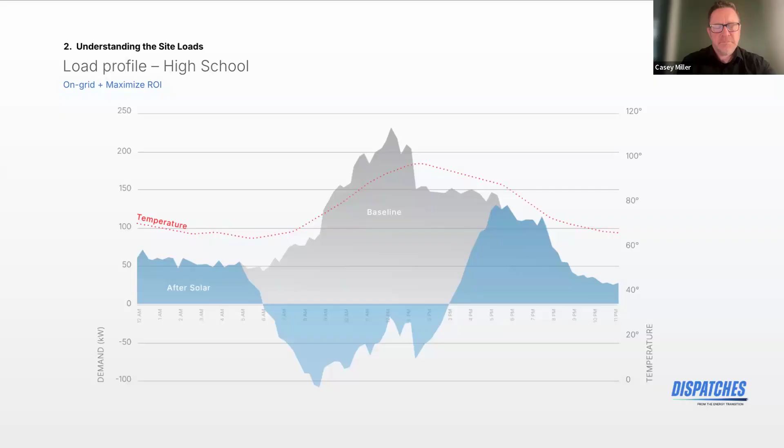Like we have a confidence interval for our estimations, but it will never be 100% confidence. So just noting all of your assumptions, all of the edits you've had to make to your data can also go a long way when you're in this preliminary analysis stage. Yeah. But Jacob, I don't know if you have anything else to add on the Mayfield side of how we generally approach that early stage of a feasibility and getting to know the site in general.

Yeah, there's more to it than just the energy. The energy is one of the most important pieces to that model. We have also done projects where you go install a meter and you actually collect data for a shorter period of time, because you typically don't want to spend a year doing this. You collect a short amount of data, maybe a month or something, and then you scale some of these other energy models around the year to make an approximation. So there are other ways of doing this.

A lot of it comes back to this risk mitigation question. How important is the risk to you as a developer, as a site owner, as an asset owner in the long run? With projects that are very, very tied to the revenue return, this is much more important, in that you can start failing on this project if you don't get it right. In those situations, you really need to reduce the risk somehow. You need to find a way.

Other situations are more along the lines of resiliency, right? Where you're looking at, okay, we need to have 2 days of backup for your selected loads. In that case, if that turns out to be plus or minus a day, you need to scale that risk appropriately, and then you can be in a much better place. So it comes down to really understanding the goals and the risks associated, looking at these with that lens, and making sure that you have the data you need to address the risks.

Go ahead, Robert, you were talking. Oh, it's okay. Great feedback on one example. Casey, you're familiar with this example. I know that Elexity is heading to the National Auto Dealers Association conference coming up soon. You work with a lot of car dealerships. Let's walk through this here.

Yeah, here's another example. It looks similar to the high school. This is a car dealership in Texas. The data is a little smoother. Why is that? Well, we actually have 30-minute interval data versus 15-minute data from this utility. So you might notice that solar is doing a similar thing to the baseline data, attacking a lot of that during the middle of the day, leaving these horns on the front end and the back end of the day. And that's the net load after solar that we're really looking at to decide how to attack that with the battery.

But this customer's use case was more about, hey, give me some bill savings to help pay for resilience. And I want a couple hours at least of backup, ideally four, make that the most affordable you can. So reduce my bill with the battery when you can, and give me resiliency when I need it. Very different use case than the high school before. A little bit similar load profile. This is actually a fall day, so you see a little bit of heating in the morning, that morning horn, and some cooling in the afternoon.

Robert, you talked about NADA and dealerships. This is a big segment target for us at Elexity. This is a customer type that needs help to both manage their building and control their energy costs. And back to the feasibility question and some of the things Jacob was talking about earlier, their buildings are changing. They're adding things like EV chargers to their electric load over the next few years. So this is a segment that we focus on serving quite a bit. They need platforms like what Elexity can offer.

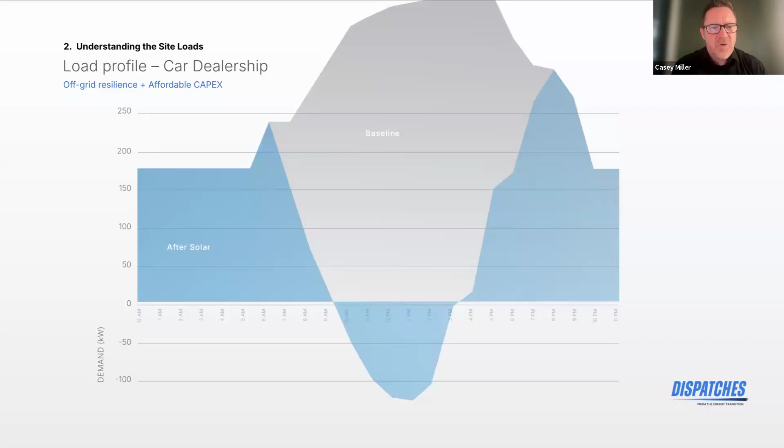I think we have one more profile to look at that's quite a bit different than this, and that's a manufacturing facility. Hopefully, what jumps off the page a little bit to you is their energy use looks very similar 24/7. Why is that? They're running three shifts, and they're really never having a period of time during that 24-hour period where they're just at base loads and maybe just keeping the lights on.

You see some peaks throughout those shifts when things like motor loads turn on, but this is a very different picture than what you saw with the high school and with the car dealership. Again, solar does a great job of attacking the middle of the day, but you're left with quite a bit of time to manage those loads that are over a megawatt at peak.

I have a general question. I'll kind of open up the floor, including you, Lucas. The C&I market segment has lagged residential and utility scale in part due to complexity, right? There's a lot of business types, building types. Where do you see the greatest low hanging fruit in the segment? So what segment type or building type do you think we should really be paying attention to heading into the new year? Or is it all of them?

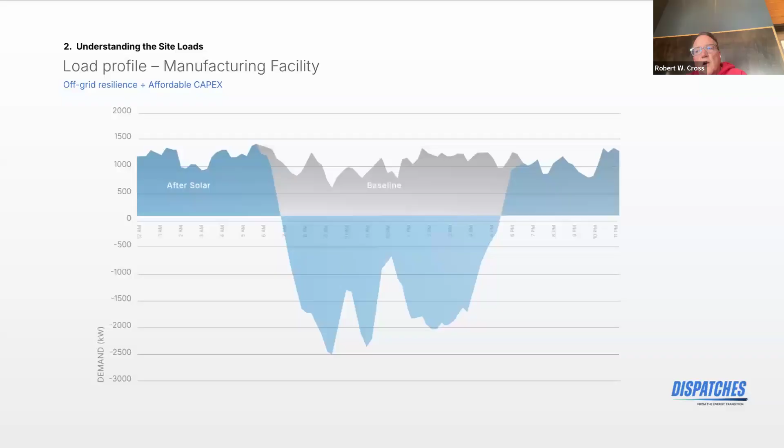From your perspective, is it refrigeration? Is it C&I? I mean, you've been in the industry a really long time and have seen the hardware side, the software side, what's your perspective heading into the new year? Well, it's a big question, Robert. I would say this from a battery perspective, really customers in the C&I space are motivated by economics, either the benefit of resiliency to keep business operations running or attacking a really expensive energy bill.

And if you have like a 50,000 square foot building or larger in San Diego, you're going to have a 2 to 3 year payback on a 125 kilowatt 2 hour battery just to attack those $90 a kilowatt peak demand charges and high energy prices. If you're in Northern California, it might be a 3 or 4 year payback period to either do arbitrage or attack demand charges. We see programs in the Northeast, like with Eversource and National Grid, or now PJM, where participating in grid services can generate almost equivalent payback periods as you do in Southern California.

So there's a lot of variability around the country. And one of the things we look at when we model, of course, are the electricity rates and where they're headed and how they're increasing. But there's some locations in this country where it is a no-brainer economically to install a battery, whether it's in a microgrid case or an on-grid situation.

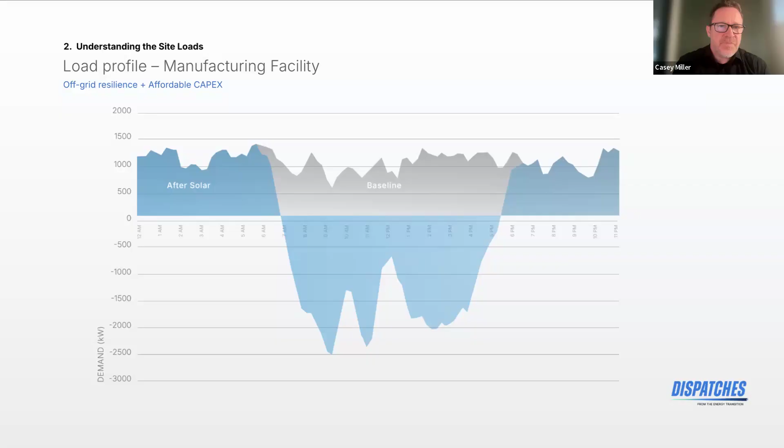Well, I want the audience to kind of hold these three sites in mind for the rest of the slides here. We're really going to deep dive into each of these and a head-to-head comparison of, is a microgrid the right solution for these sites? What is the impact that a BESS could have financially or otherwise? We're going to build this slide up piece by piece to do that head-to-head comparison and then end with a few case studies.

Jacob, maybe let's start with you. So we are in what we're calling the third pillar at this point. So we're in modeling, executing on the project plan. Talk a little bit more broadly about what stage we're at here in the process and really what goes into this third pillar. So this is where everything starts to come together. This is where you're actually doing the analysis of the different pieces. You're building a computer model of the site. You're looking at what economic benefits there are, what resiliency you can achieve.

As you change things, this is where you can also test things. You want to do larger, smaller BESS. You want to bring on this dynamic load control that we'll talk about in a minute. You want to bring these things in and start really analyzing what the site or what this project is going to look like, and how that's going to best achieve your goals.

This includes things like the actual model, which there's a number of providers out there that have software for this, but you have to have the understanding of these modeling software packages to be able to select the ones that make the most sense for the project type, the efficiency, everything else. This is also where you're really looking at, okay, what feasibility is needed to reduce risk for this specific project rather than being an all-inclusive option.

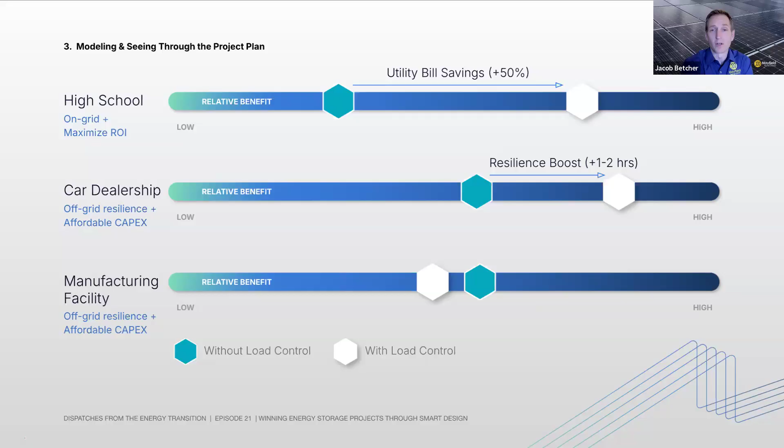Yeah, as you said, the rate of change in this market is very large. It's growing very fast as well. There's a challenge with that rate of change in that there's a lot of new people coming to the market. And for our part of the market, which is that middle market, there's people coming from residential, there's people coming from utility scale. There's some complexities here that are very unique to the market, and we do need to continually educate and grow and help people understand things.

If I take it from a little bit different perspective, our clients are developers who are doing a number of projects per year. They are seeing the projects that they're doing. As engineers, we see hundreds, often 10 times plus what our clients are seeing for projects. And this gives us the unique advantage of learning things much quicker. So part of that, again, is bringing that back to the industry.

One of the reasons I was really excited about this call today is talking about this dynamic load control, what Elexity brings to the table here. I'm going to make a little pitch for Elexity. This is something that a lot of the industry doesn't know about. The industry doesn't really know that it's available. It's something that can add value, and it's relatively straightforward. This is not brand new technology. It is taking technology that's been in the industry for a long time and bringing it together into this ability to control a microgrid and a facility. And this slide shows very well, in some places it's almost a no-brainer to bring this type of technology into the project.

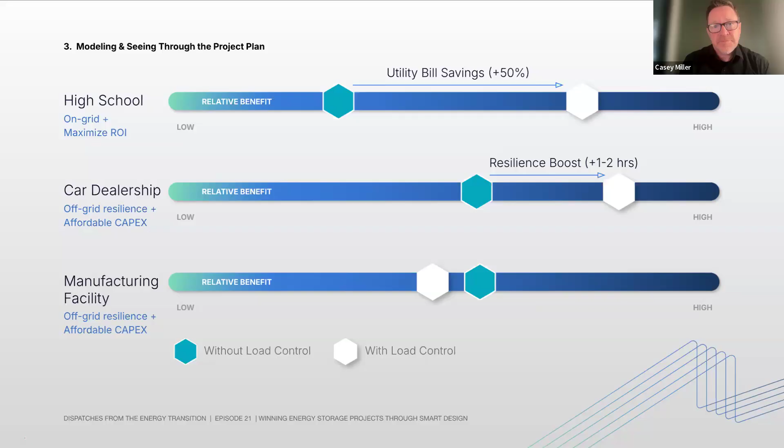In that case, boy, it's off the top of my head, but it probably under-delivers by about 30% because of a technical interconnect limitation that was missed. I'll talk about this in a little bit different direction. Casey gets to see, and he's part of that operation of the systems afterwards, so he gets to see a lot more detail on that.

One of the things we've seen at Mayfield is that people will come to us asking about feasibility, and they have conceptions about what their products are going to do, how they will perform. And the number of times that we've gone through the feasibility efforts, starting with these three pillars, working through with the clients, and getting to the point at the end of the day where they have completely changed their expectations or changed the products that were used, the sizes of things that were used because of that feasibility analysis.

And that is something we see probably more often than not, is that the feasibility study led to core changes in the design of the system before engineering happened. All of that would have ended up happening after engineering, and a large timeline delay and other risks that would have come up because it was not done early. But we do see quite a lot of change early on in that project because of the feasibility analysis.

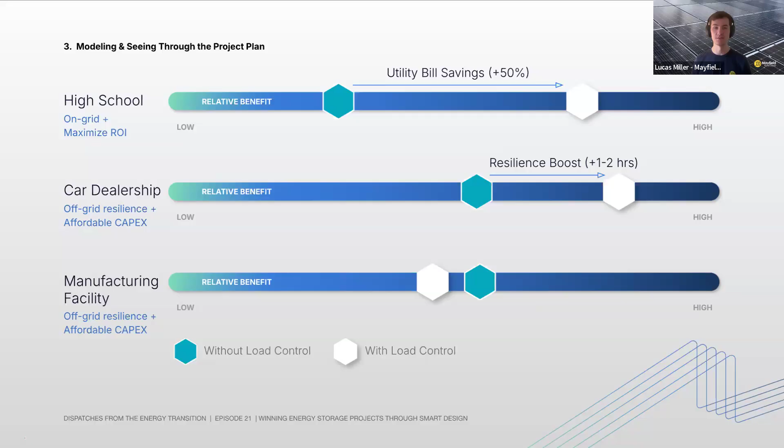facility manager. And so when we went in and looked at the data 5 years later, the system was operating at half capacity because nobody was keeping an eye on it, doing basic maintenance and upkeep, or even paying attention to the monitoring. So going back to stakeholders, goal setting, don't forget that these are long-term assets. It's not a set it and forget it. It's a who's on site to be keeping an eye on this and making sure it's still working as intended.

Well, we've got about 7 minutes here. I think, Casey, depending on how quick you are, we can definitely get through one of these. But I'll kick it to you. Well, I'll try. And we love the questions from the audience, so keep them coming. Even if that means we just get through one of these.

All right, we're going to just dive into a little bit more detail about modeling. And we're picking the second example we had, which was the car dealership that wanted both some on-bill savings and resiliency from their battery, with resiliency being the key benefit driver. So when we model at Elexity and we consider whether load control is a fit for the building or not, we look at a lot of data sources. This is one of those pieces of information that helps inform us whether load control is a fit.

In fact, this is a beautiful graph. What you see is peak demand on the y-axis and ambient temperature. So not temperature in the building, but ambient temperature at this building. And this is every 15-minute interval plotted over a year. And what you see is a strong correlation between temperature and peak demand.

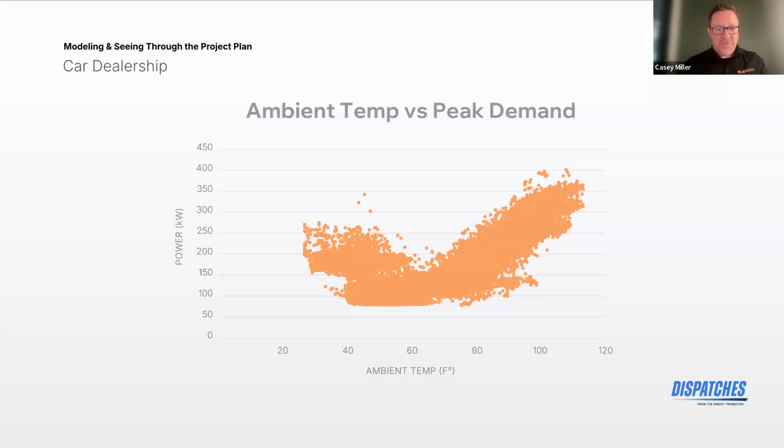At colder temperatures, kind of the smaller spike on the left-hand side, you see peak demand getting upwards of a little over 250 kilowatts. That's from a heat pump heating in the winter. This is a site that has heat pumps for heating and for cooling, so electrical load for both. And in the summer, obviously at temperatures getting north of 90 degrees, the peak demand of the site is set by cooling. This is illustrative of a great example of a project that would be a fit for HVAC load control. Next slide.

So what we do is then we model the site, and we're going to just start with a modeling of this site for resilience, assuming no load control, just baseline looking at post solar. That's the blue again, and then how would the battery support a grid outage event? And here we have a grid outage event happening in the late afternoon around 4:30 p.m.

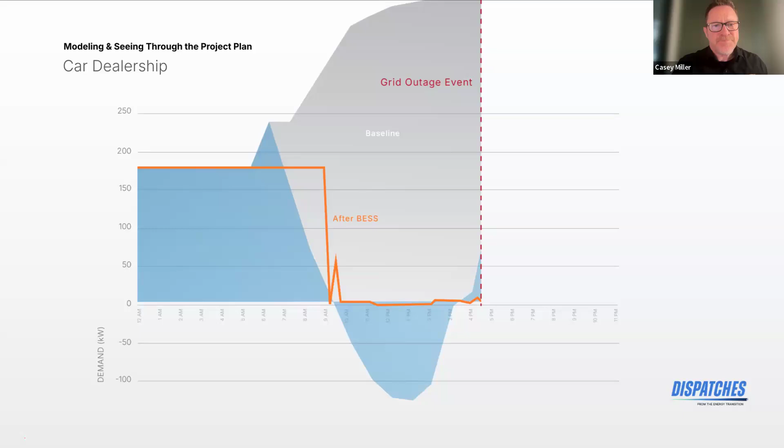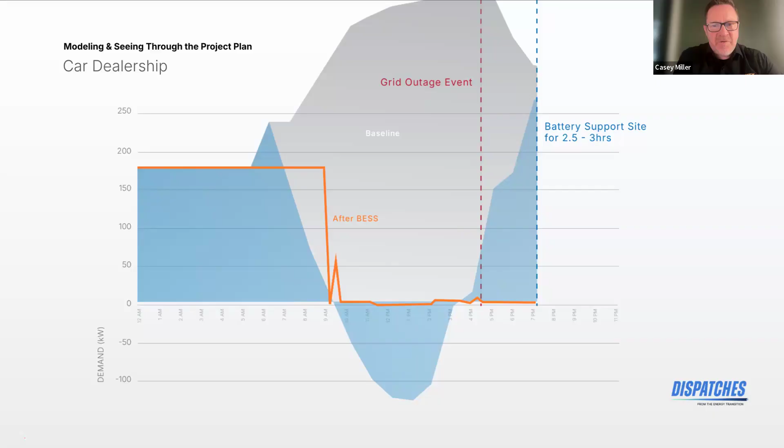The battery charges a little bit during the day, so soaks up some of that early solar generation to charge the battery, and then that outage event happens. The next slide, Lucas. And that battery can support the site and its net load. So again, its net load is that blue graph, so post solar, and support that site for about 2.5 to 3 hours. Pretty good. But if you add load control, you get a completely different result.

And again, this happens without the customer doing anything. This happens on autopilot, right? Elexity's controlling those systems. Nobody's going into an electrical room and turning off breakers or shutting systems down. This is software-based load management that extends the duration of the battery.

What do you think, Casey? 90 seconds enough to get through one more, or should we jump ahead? Well, I'd say are there any questions from the audience? We do have one from Howard on modeling softwares. So at which point would you bring in a power flow study, such as ETAP, versus trusting software like Aurora, Helioscope, PVsyst? I think I'll let Jacob handle that one.

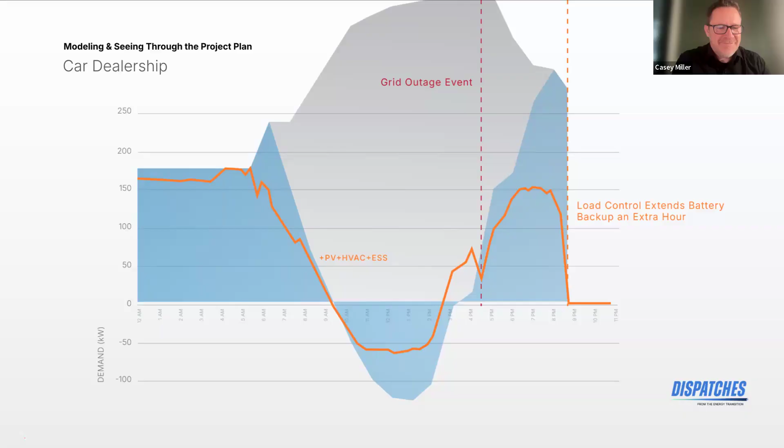Yes, it's an interesting question. The real question here is when do you select different softwares? And Aurora, Helioscope, PVsyst, these are different software packages that really do have value at different stages and for different times to either show what your system is going to do or reduce risk or both. The ETAP level of detail, often that's done in engineering. It can be brought in earlier if there's a specific risk to reduce.

Typically, from what we've seen, any risk associated with ETAP results can be handled during the engineering stage without significantly impacting the project. So a lot of that doesn't hit in this feasibility piece. The feasibility piece really is where you're looking at the financial risk, the bigger picture risks and stuff like that. That's not to say that there wouldn't be an opportunity to bring ETAP in at that stage, you could. Yeah, I think that's pretty straightforward.

All right, we did it. We got through almost everything. We, as always, land on some key takeaways here to close us out. So kind of in line with the 3 pillars we looked at today. So first, aligning all stakeholders, keyword all, on achievable goals, keyword achievable, as early as possible. Understanding your site, even going beyond electrical loads to what construction limitations there could be, maintenance, anticipated changes in the future. And then lastly, load control can unlock additional savings and performance benefits, like that car dealership example we just looked at.